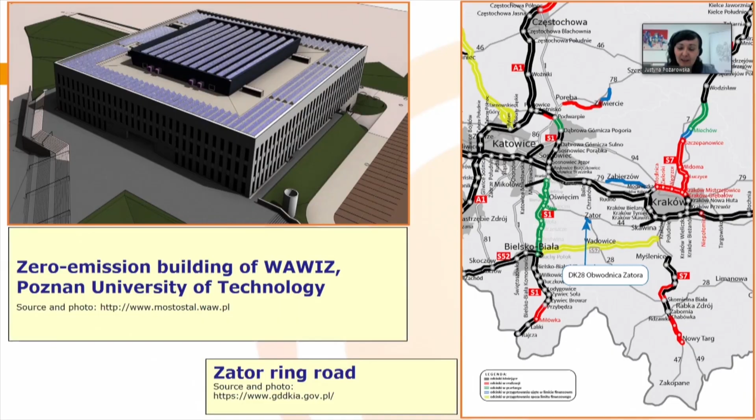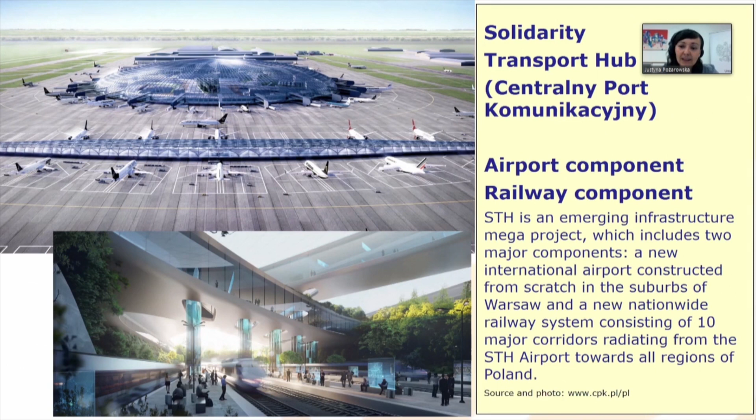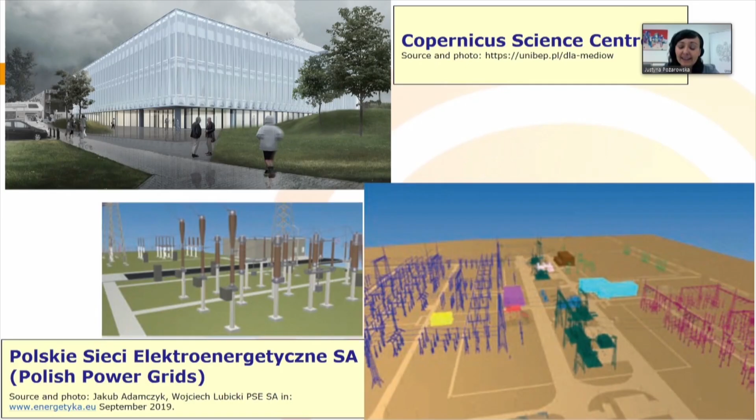Just to give some examples of ongoing projects: here we have a zero-emission building at Poznań University of Technology, and also the ring road example pointed out yesterday. The Solidarity Transport Hub is a new investment where BIM is supposed to be used for both the airport and railway components. There's also the Copernicus Science Center in Warsaw, investments of Polish power grids, the skiing and biathlon center in Jakuszyce, and the music center in Krakow — just several examples to give you a flavor of where we are.

We have quite a broad number of stakeholders currently active in the area of the interaction between BIM and procurement. That's the BIM applying contracting authorities, also BIM designers, architects, and construction contractors who for now are able to use BIM tools. Broad scope of BIM related associations active in Poland. For the time being, academia is able also to provide trainings on BIM in form of specialization at regular studies, but also as postgraduate studies.

We have several public institutions involved in the BIM topic. First of all, Ministry of National Development, which is responsible for the construction sector, Ministry of Infrastructure, Public Procurement Office, and several other specialized offices. I will not point here all of them.

We have also very important initiatives ongoing. The first one is BIM Standard PL, which is going much from the bottom, and I think this is the first serious attempt at broader standardization with the participation of many different important stakeholders. We have also an initiative going from the top, from the Ministry of National Development, which is the forthcoming Polish roadmap to BIM and BIM working group, together with the pilot project in social housing.

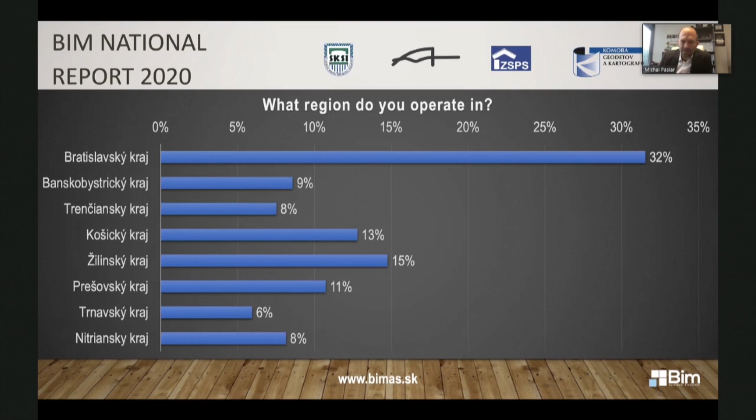This divides respondents into two groups: infrastructure sector and building sector. As you see, the building sector is about 65%, and the infrastructure sector is about only 35%.

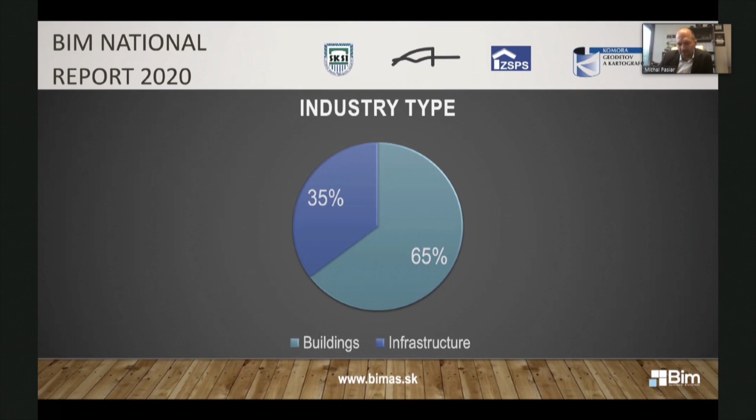But I think this is a question of time until it will be half and half, or maybe the value of BIM is greater for the infrastructure sector, so we have to wait now.

Current use of BIM - this question to our respondents shows that half are not using or not interested in BIM. That's the current statement, but from my practice I see that the situation is getting better every year.

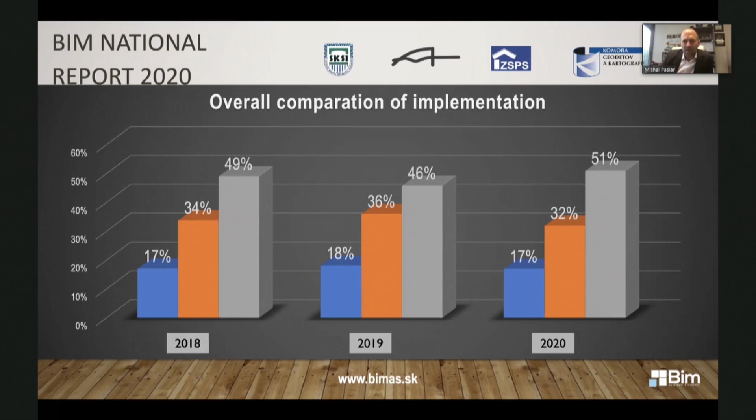Now you see the overall comparison of implementation through the last 3 years, comparing building and infrastructure sectors. The blue color represents already using BIM, the orange color is interested but not using yet, and not interested is about 46% in the building sector and about 60% in infrastructure.

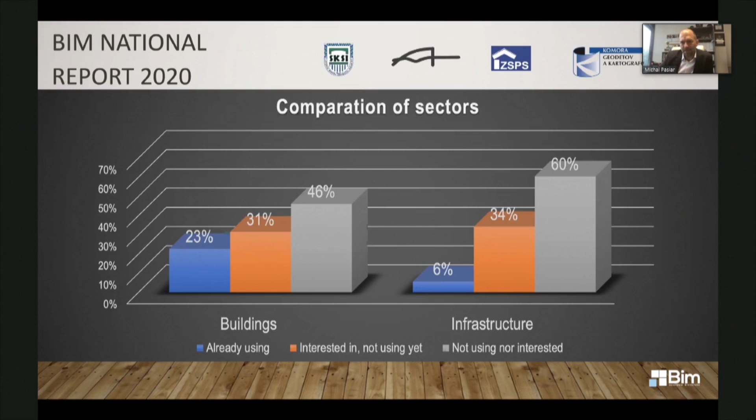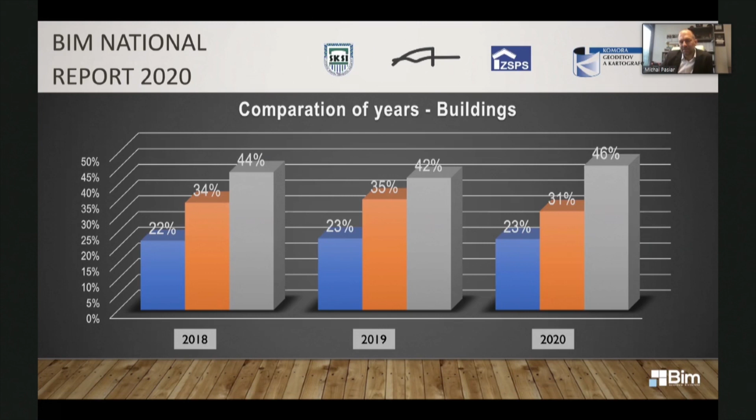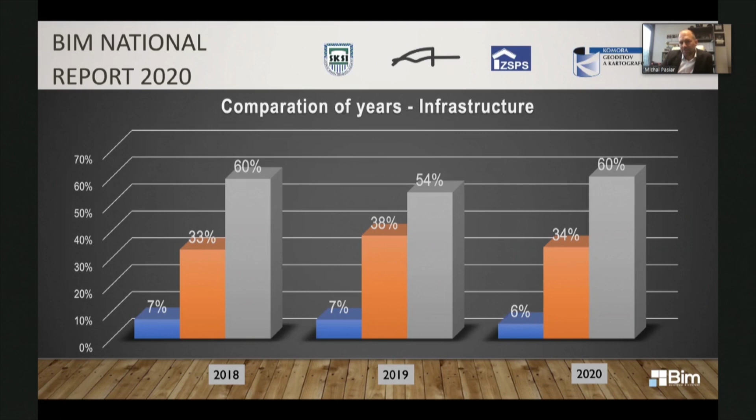This is a comparison in building sectors through the last 3 years. As you see, the progress is not big - we cannot see it in big numbers yet. I see the reason in a situation where there's no big and strong demand in our market from investors and clients, because from my point of view, many investors understand BIM as a cost or extra cost, not as an investment. Most investors understand BIM as a tool for architects or engineers, but I think that is a mistake.

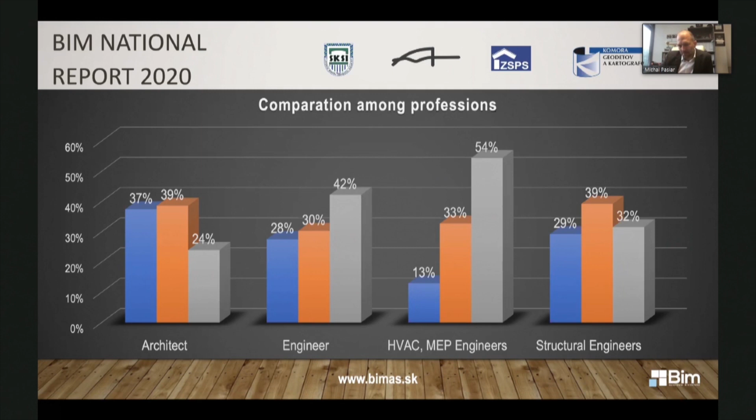So, comparison among the professions - as you see, the biggest problem now in our practice is to find MEP engineers and HVAC engineers who have skills for BIM. That's the biggest problem in our practice, but I think it's very similar across Europe.

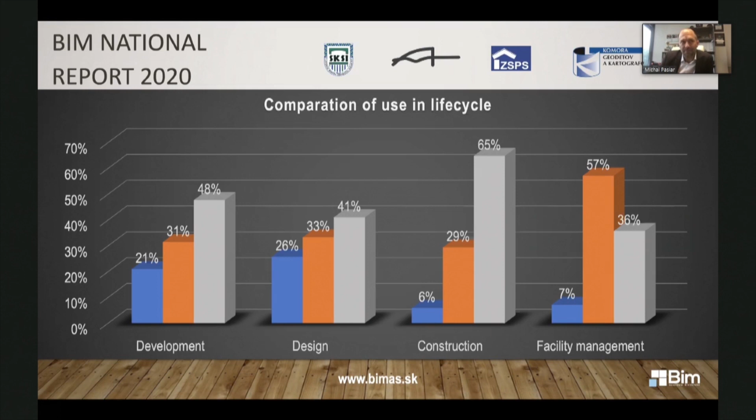If you see the implementation of BIM as a comparison of use across life cycles, the BIM is used in development and design mostly. In construction, there is a whole gap. And of course facility management - we have some pilots already in Slovakia, but nothing huge.

This was a question to our respondents about how they are feeling about their skills in BIM. As you see, 14% of respondents rate themselves as experts, about 60% see themselves as advanced, and beginners about 20-25%.

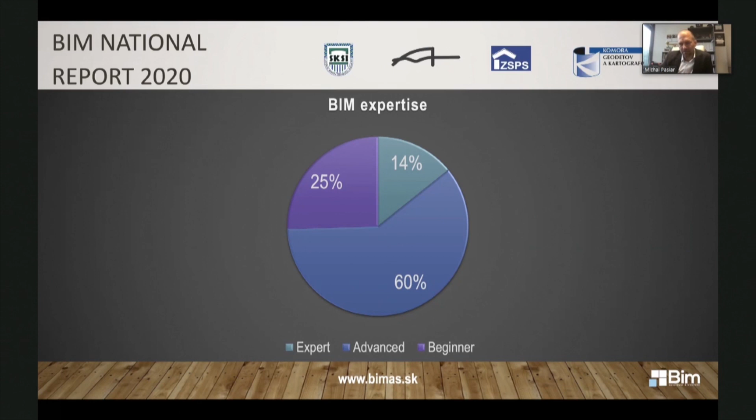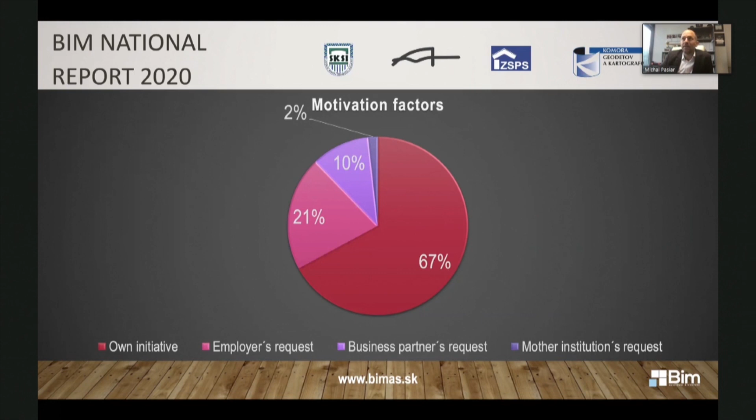This is the problem I mentioned before - they do BIM or implement BIM mostly by their own initiative. As you see, 67% have motivation to use and implement BIM in their companies and practice by their own initiative, which is of course sad. I think this is also a question of time, when investors will change their minds and see the BIM platform as their investment and advantage, and of course their tool, because BIM is mostly a tool for the client.

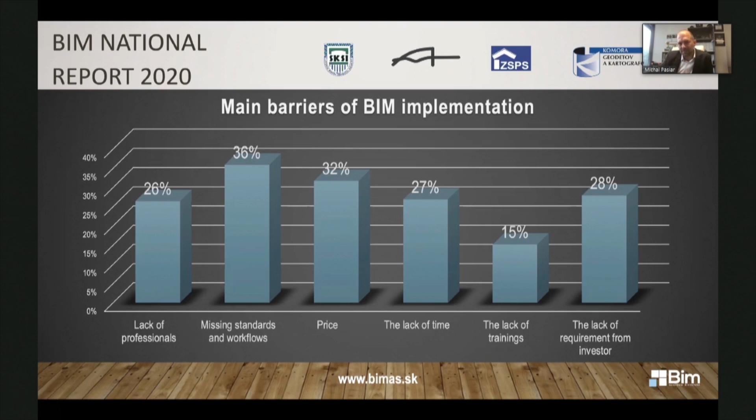Barriers, by opinion of our respondents: price, a lack of professionals, and these things. This is the opinion of our respondents, our practice now, and future expectations. Based on this information and percentages, you can create a picture of our implementation of BIM as a topic in Slovakia.

17% of our practice - architects, engineers, construction companies, facility management and so on - already use BIM. It's not huge, but we can say we are still at the beginning. I think it's according to the problem I mentioned. So we can divide it: when we talk about the private sector, it's about the understanding of the value of BIM, and when we talk about the public sector, it's about the interest of our government and understanding this issue as the future of the construction industry as well.

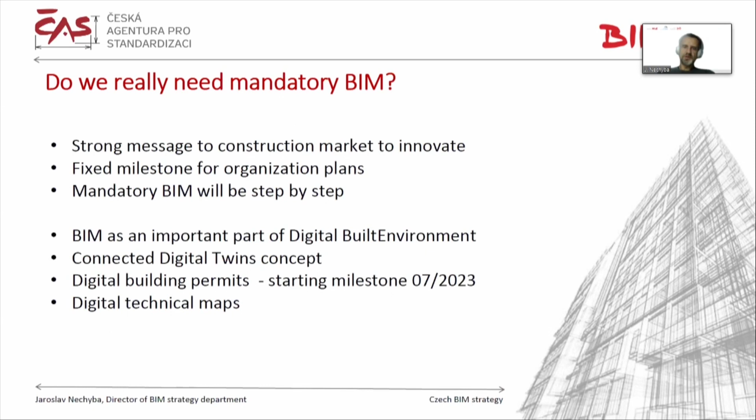What does it mean, the Czech mandatory? Because if you just say mandatory BIM, 10 people will imagine 10 different things. So we need to really precisely define what is called BIM when it's used. So we have the 3 pillars on which we really build the mandatory requirements for the public procurers and

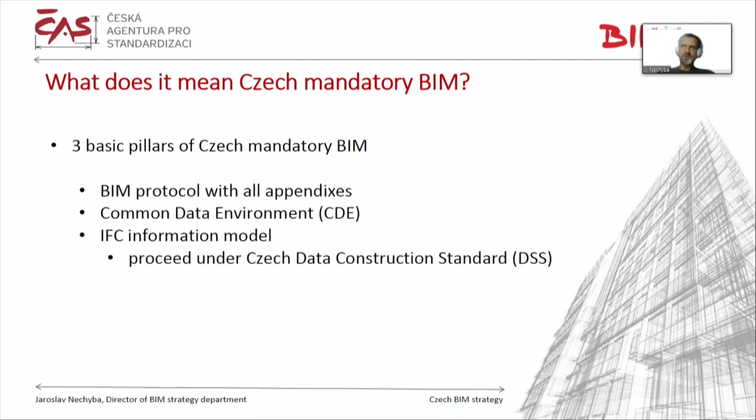for the suppliers as well. Those three pillars are listed here. It's nothing new under the sun, it's generally known things, but we feel it's very important to really precisely define those 3 things. Where is the detail, and where we can say it's a green light or the red line if you

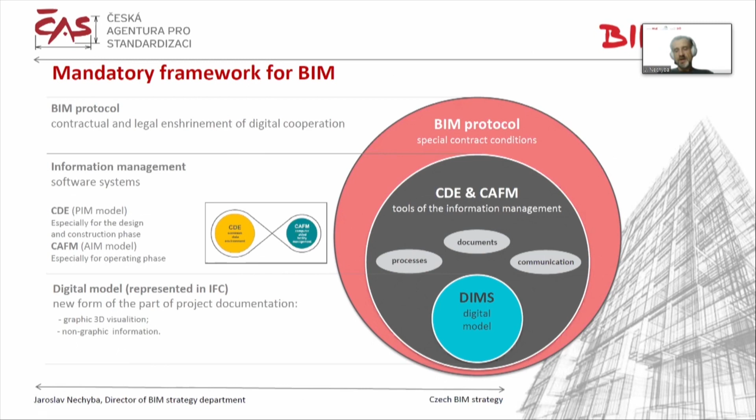Yeah, so this is how it works. It's three circles inside of it, and also showing one of the aims. It's aiming to the operating and maintenance phase, because we believe there is the most money saved in the future and the most efficient things where BIM can be very helpful. So we are really heavily focusing on the last stage, the biggest stage of the entire life cycle.

So that's it, the key outcomes from our strategy. One which is very important for us, and we found it's one of the missing parts for the Czech standards, is about the construction contract standard, because we don't have it. On infrastructure it uses FIDIC standards, but generally it's not accepted by the rest of the industry. So we need to build this construction standard, because when we want to digitize some processes, we need the standard process, not specific ones for each building, each special case.

And of course, the construction standard must have the BIM protocol with all the appendices for the exchange information requirements, for the CDE, and requirements for the BIM execution plan, and so on. So that's one of the key outcomes. Of course, guidance for public procurement, which was mentioned by the Polish authorities as well, since there are lots of restrictions and regulations which we must meet. Of course, the CDE guidance - CDE is a big topic across the ISO 19650 series, but there's lots of guidance needed to take it to real life.

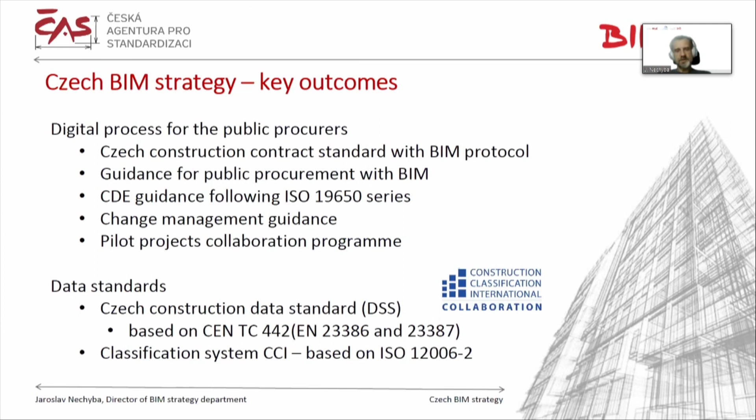We know that the Polish organization Building Smart, the Polish chapter, is very active to take part in that organization, and Slovakia's organization as well. So that's great for us, and we are quite open for other countries to cooperate.

And this classification system is already published on our site, which is our main website where we publish all the information, documents, articles and so on. All pilot projects are published there as well.

I'm sorry, it's just in Czech, because we were not able to translate it on the fly into English or other languages, but I think you can handle that with Google Translator. It can give you a quick overview of what the content of those articles or documents is.

And the classification system is published there as well. It's online, you can use it online, and you can download the Excel file with the content of the classification.

And the most important information is that the license for that classification system is an open license, so it can be used for free by any stakeholder, company, or organization which finds it useful. So if you want, you can look at that website, download it, and form your own opinion on it.

So that's it. I hope I fit into my 15 minutes well. Thank you for your attention, and I'm open for your questions and discussions.

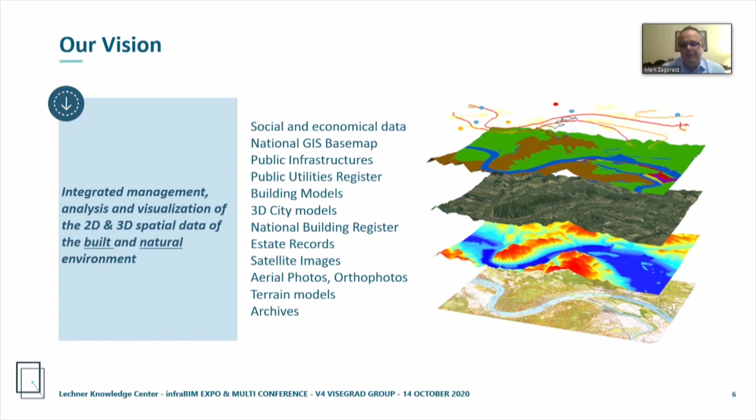Our vision is that we would like to handle all the data we are already handling in a unified, integrated system, and in this system we would be able to do the management, analysis, and visualization of the built and the natural environment altogether. Let me show one example of how we are developing this and how we would like to show the users, citizens, contractors, or designers and architects that this system can benefit them as well.

We have a system called e-public utilities, e-közmű in Hungarian. It's an integrated electronic public utility registration system. This system was already launched in 2013, but it's under continuous development since then.

We developed a network where the public utility providers give or provide their data to us on different channels. It can be across a data center, across a cloud service, or directly broadcast to us. We are not changing their data at all, we are just broadcasting it to the users who require it. This is good because this way all public utility providers are responsible for their own data.

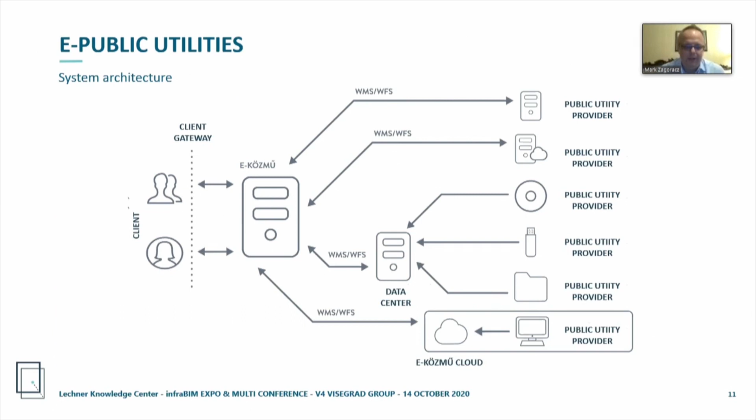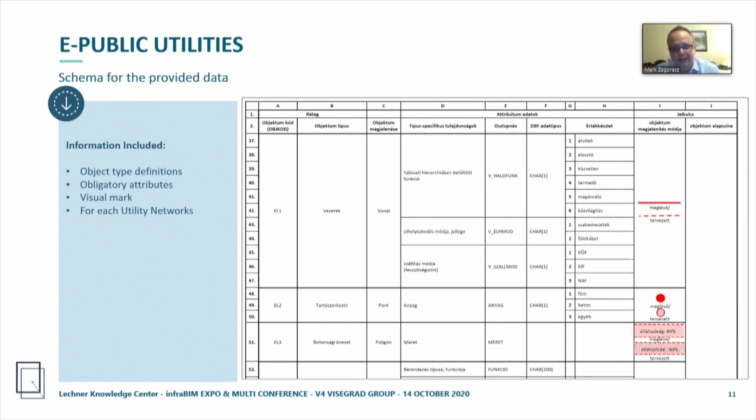Of course, for this broadcasting and integration of information, we had to create a schema for the provided data. This schema was extended to the object type definitions, the obligatory attributes, visual marks, and it was done for each utility network.

The system has three main modules, but due to the short time, I'm only going to present the information module. Maybe this is the most spectacular one.

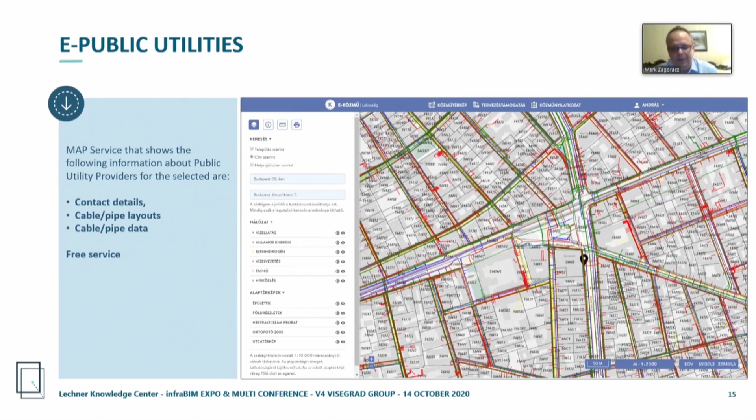This is a map service that shows information about the public utility providers. You can just select an area on a map, and then you can get details of the provider, contacts, the pipes or cables of each provider, and of course all the data about these pipes and cables. It's absolutely free. Let me show how it's built up.

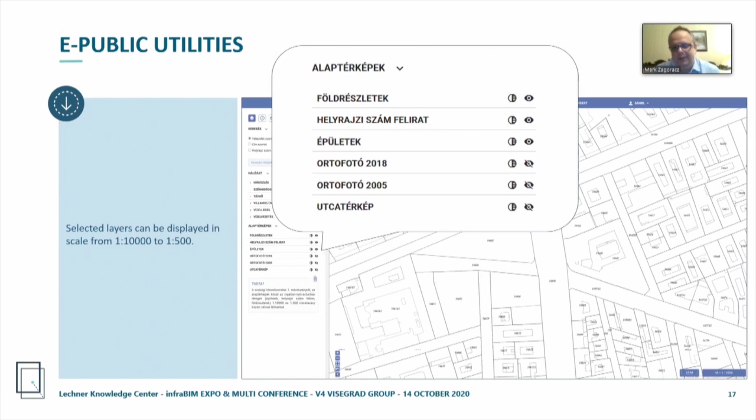So there is a base map. You can set the scale like any map service you use, and you can switch on or off the different layers. I didn't translate it into English, please forgive me, but in the next slides you will see. So this is the base map; you see just the borders of the lots.

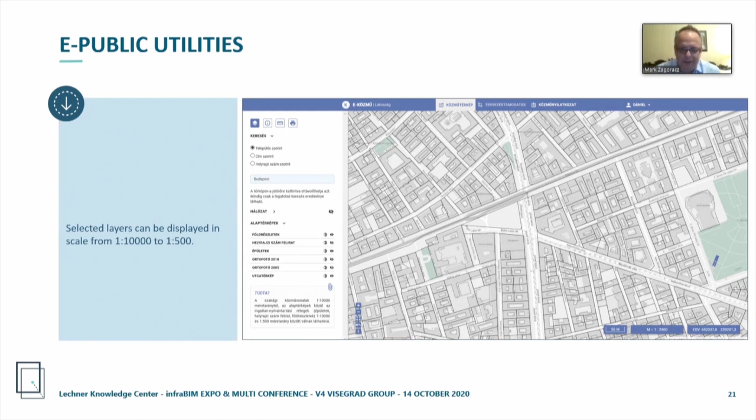In the next step, you can switch on the layer of the buildings. Next, you can see the actual registration number of the lot. And then you already have a two-dimensional, already a three-dimensional projected view of the buildings. Finally, you can put the orthophoto on the same map as well.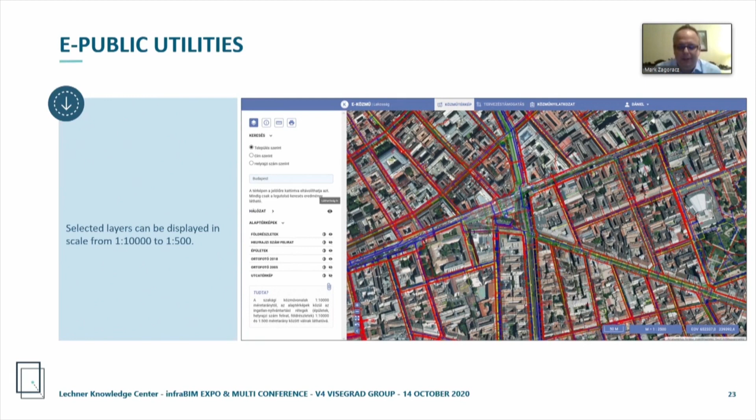And you can switch on the public utility networks, defined by different colors. For example, the green one is for data networks, the purple one is district heating, the red one is energy like electrical network, the blue one is water, and so on.

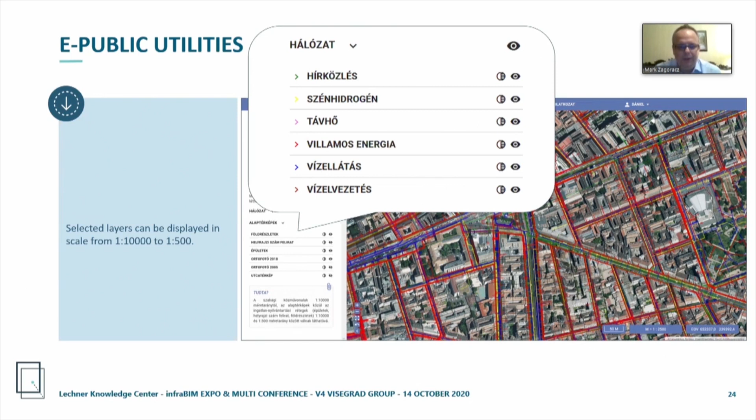And since the data providing is regulated by law, this law also asks the public utility providers to give not just two-dimensional information—x and y coordinates of their systems—but also z coordinates, and this way we will already have, let's say, 2.5 dimension data. So it's not a real 3D model, or a real 3D element, but knowing the diameter and the exact coordinates, we can already place these pipes and cables into 3D models.

We would like to develop this existing information into an augmented reality system, which can help the contractors and the constructions, and it will be very helpful to know.

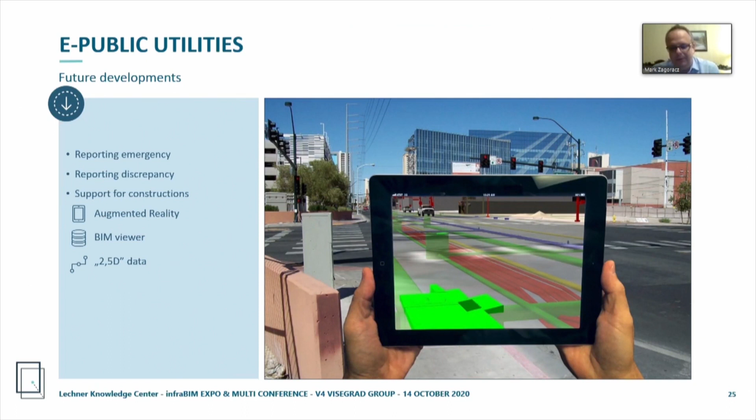We know that this is not 100% accurate. We have plans that for the most interesting parts of the cities, we will try to merge this information with on-site surveying, so with X-raying the ground, and to make a more proper surveying and more proper data.

How it can be integrated with the other users of our systems. For example, we have created a BIM viewer module, which is ready to accept IFC files instead of PDF files. And this module is totally online. It's an online application, web application.

It's absolutely open source. We have collected all the functions from the best, let's say, the best desktop versions. We also had very good ideas from BIM Vision, for example, which is a Polish product.

We prepared this module to use with other developments, for example, with the public utility system, so that when an architect wants to design a building on a lot, on an empty lot, then he or she can immediately check the actual position of the public utilities, where are they exactly around that lot, how he can solve the connection between the building and the public utility which is on the street.

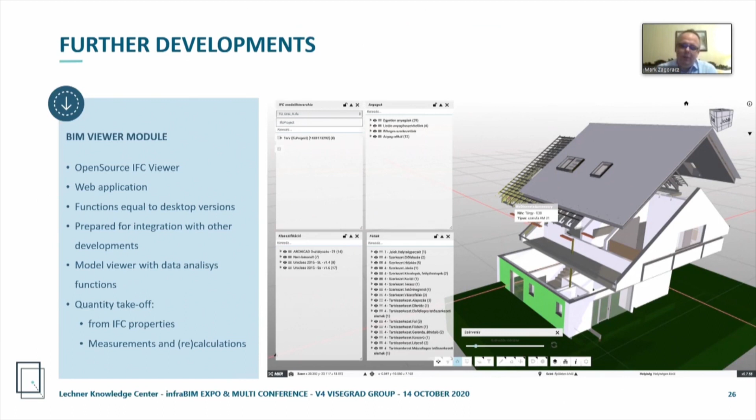So we hope that with these tools we will be able to show to our users that BIM is something which is worthy to use, and if we can give smart solutions for them, or the possibility for smart solutions, then they will try, and they will try to use it more frequently.

We also established a website. It's called BIM Center, where we share actual information, where we share short descriptions and best practices.

And we also created or issued a BIM handbook. It's about the main concepts and, let's say, it's a vocabulary. And also we try to describe in a very detailed way the BIM uses, the possible BIM uses, so that the general contractors and the investors and also maybe the politicians can decide whether they would like to use BIM for some purposes or not.

We have some research projects as well. We try to integrate GIS and BIM data.

This is a pilot project where the building regulations are merged into a 3D file together with two-dimensional and three-dimensional building shapes. It was done by UAV, so drone surveying, and then we created the building shapes automatically, and we placed them onto the areas projected to a three-dimensional terrain model.

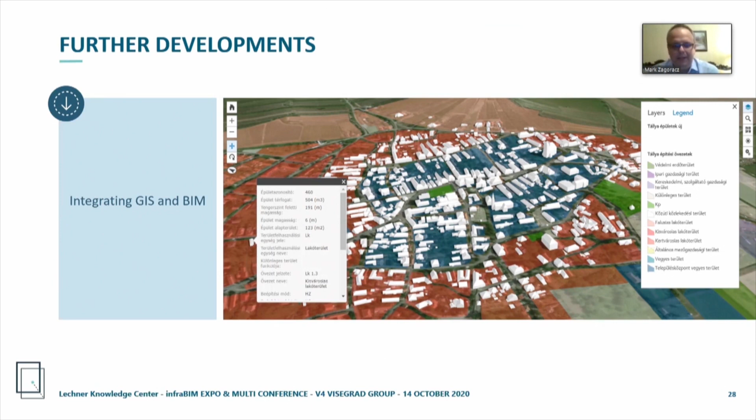And I hope I didn't exceed my time limits. Thank you very much for your attention, and I'm ready for your questions.

Thank you, Mr. Zagoracz. It's very good that we have a guest from Hungary. Well, it was in Hungary, actually, where the first BIM application was made, ArchiCAD.